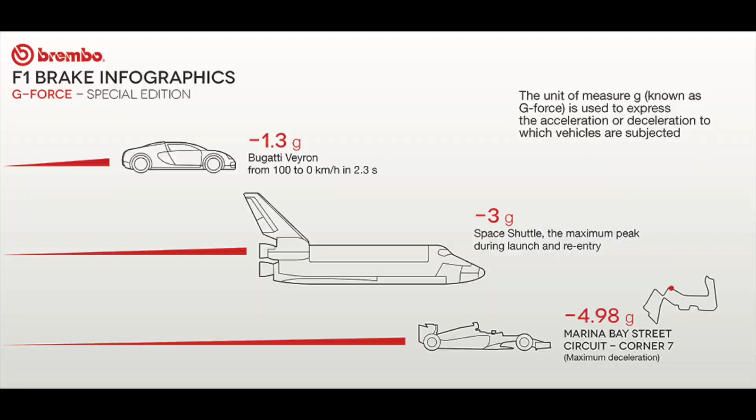During deceleration, the driver's head weighs over 50 kilos due to the 5G load. That's also why drivers do a lot of neck training.

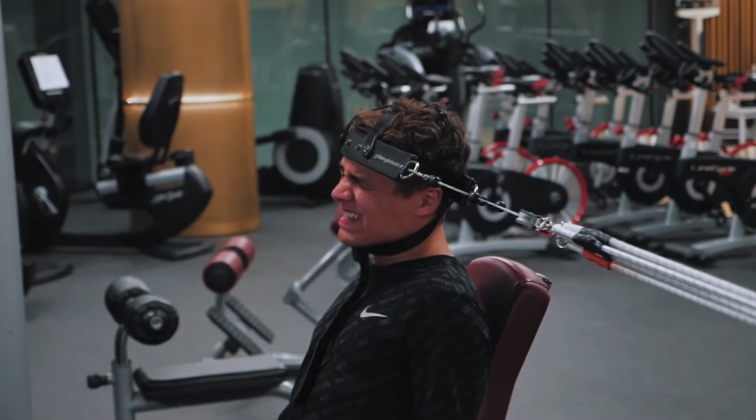If a driver tried to push the pedal in a standing Formula 1 car, he actually wouldn't be able to push it hard enough. So the driver uses his weight multiplied by the 5G force during deceleration towards the pedals to generate the pressure they need to push the pedal.

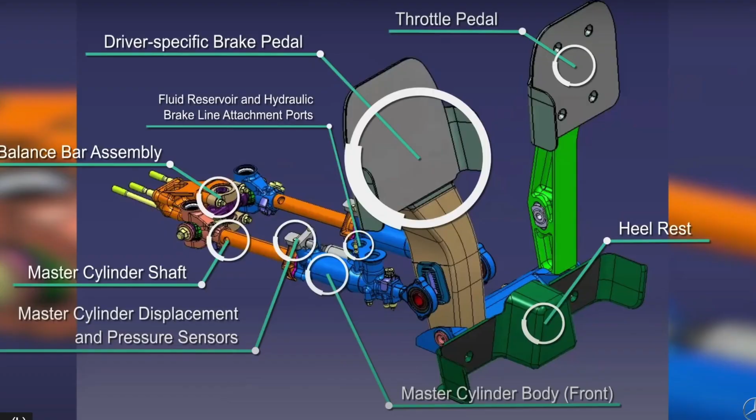It's purely up to us to maximize the braking potential. We always want to brake as late and hard as possible, using the downforce. In other words, during braking, their bodies slide towards the pedals, and thanks to this extra force, drivers can push the pedals.

Your cars at home have a servo system that multiplies the pressure you apply on your brakes to provide that necessary force. This car has ABS, an F1 car doesn't - anti-lock braking system makes your life a bit easier in a road car.

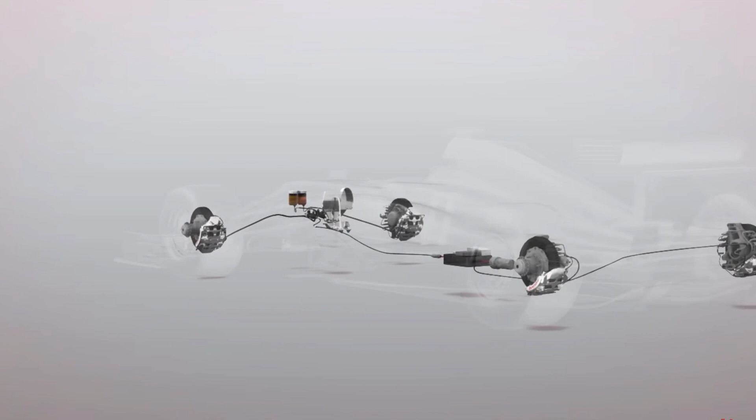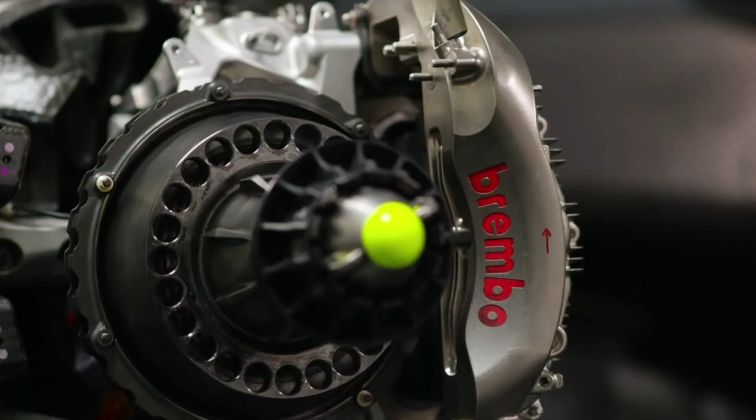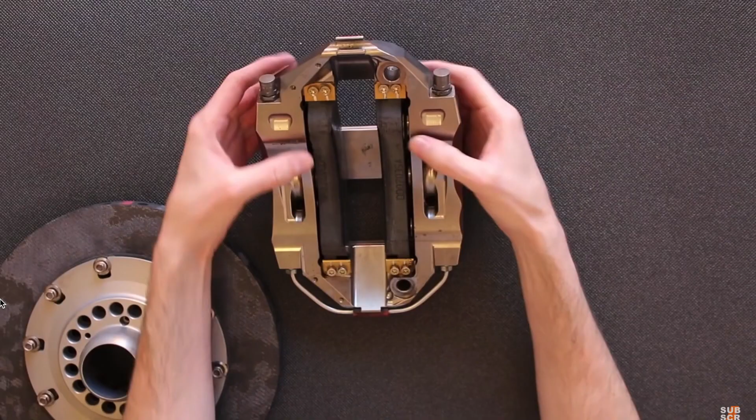Once the driver pushes the pedals, the pressure is applied to two master cylinders. One cylinder is filled with fluid connected to the front brake system, and the other cylinder is linked to the rear brake system. The applied pressure goes through the brake pipes into the pistons housed in the calipers. Calipers have 6 pistons; those pistons push the brake pads and they clamp around the brake disc. The friction between the pads and the disc slows the car down.

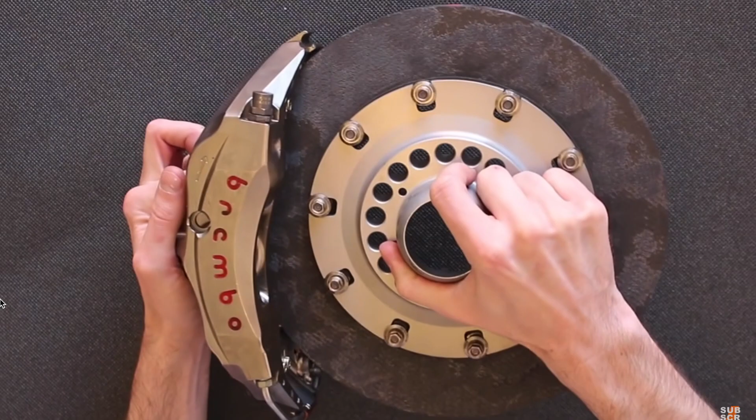Brake pads are tightly fitted between pistons and the brake disc. The front brake system is this simple hydraulic system. The rear brake system, on the other hand, is a little more complicated due to the energy recovery system, which we will talk about in a bit.

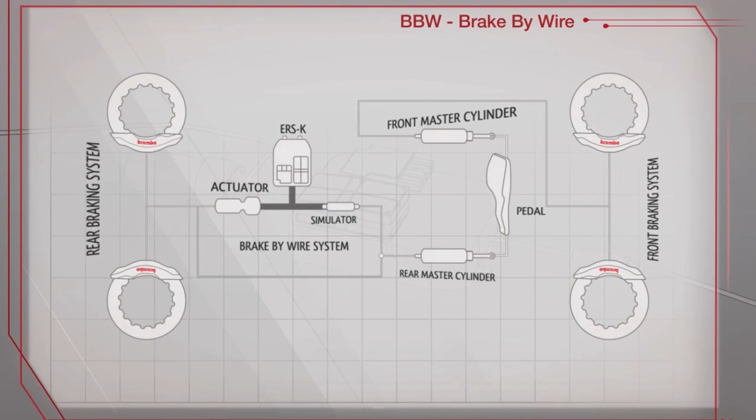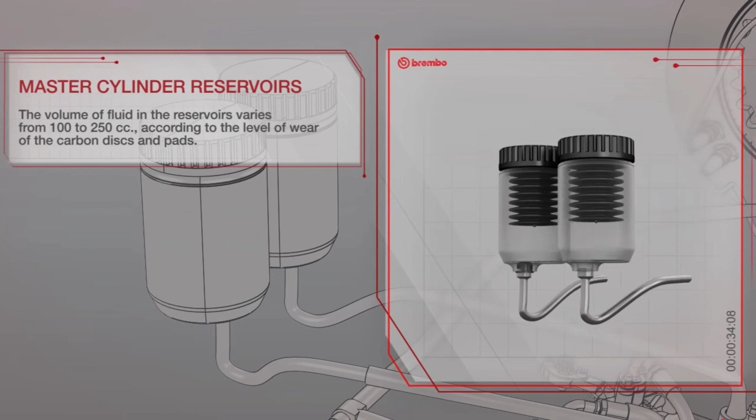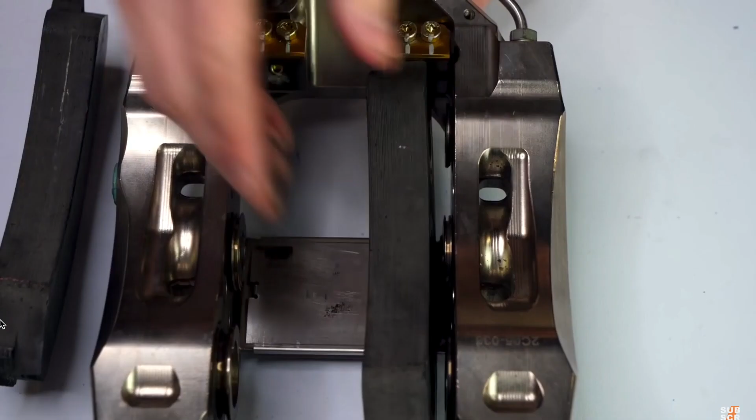Master cylinders are fed with master cylinder reservoir through the brake pipe. Master cylinder reservoirs hold 100 to 250 cc of fluid. You need these reservoirs because during braking, the brake pads wear off due to thermal degradation. The brake pads keep getting slimmer and slimmer due to wearing, so the pistons and calipers move further and further, creating a space. That space needs to be filled with the fluid in the reservoirs.

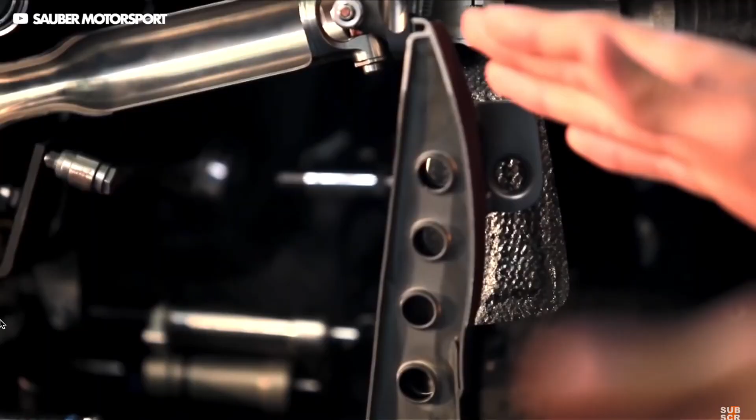The little nozzle you see here is connected to the reservoir through a hole. Once the pedal is pushed, the shaft you see here moves, and the other end of the shaft, which is a piston and a seal, covers the hole. Now we have a closed system, and the incompressible fluid inside the cylinder chamber moves into the brake pipes.

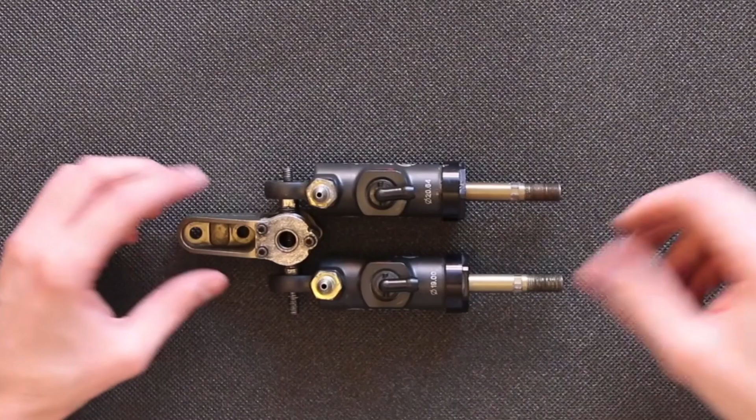Master cylinders are connected and can float like this. This is to create the brake bias, which is also called brake migration. Brake bias determines how the force is shared between the front and the rear of the brakes.

Ideally, you want each brake to do half of the energy dissipation, since an imbalance may cause understeering or oversteering. Roughly, the weight distribution is dissipated 45% front wheel and 55% rear wheel. Under heavy braking, most of the weight shifts towards the front wheel, so the brake bias sets up towards 55% frontwards.

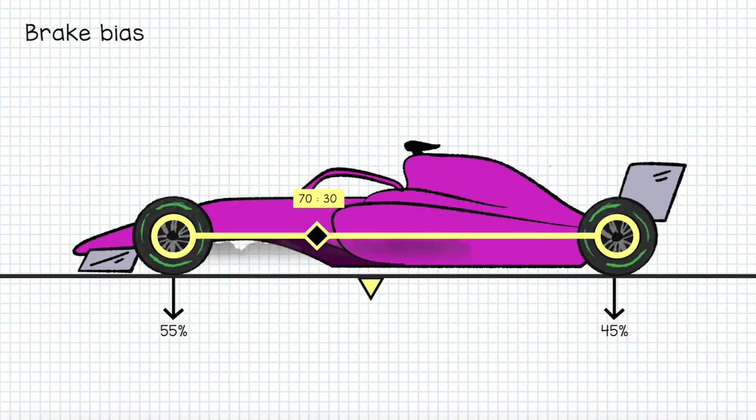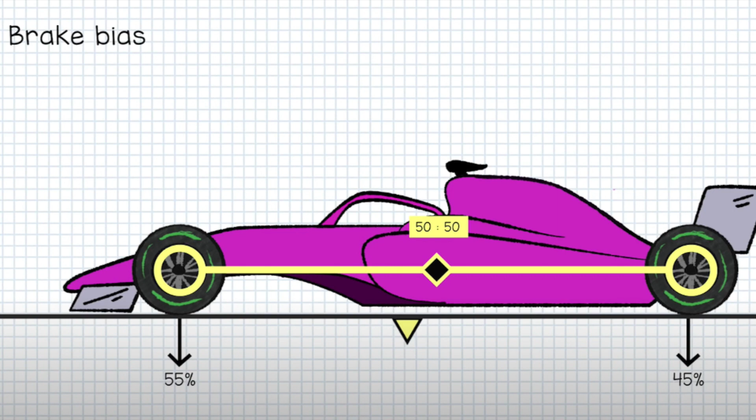Too much front brake bias locks the front wheels too tightly, causing understeering. Too much rear bias would cause the back of the car to lock too tightly, and the car would spin or be unstable. Ideally, you want weight distributed equally, and when the brakes are pushed, both rear and front lock equally. But if you have to make a choice, a bias favoring the front would be a better choice, since dealing with an unstable or spinning car is the worst case scenario you don't want to deal with.

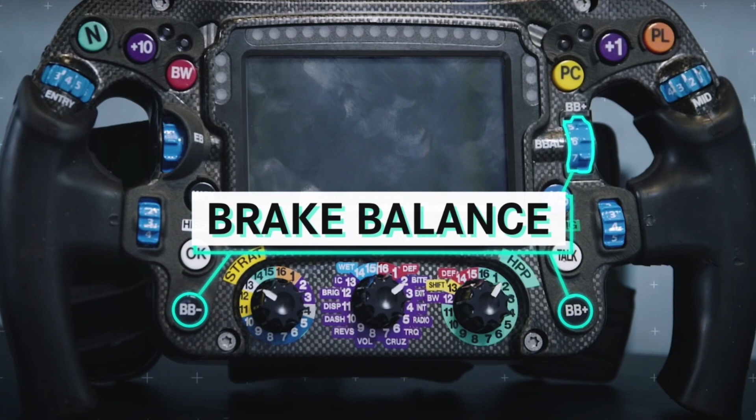Drivers can adjust the bias from the cockpit, but this is only allowed when they are not on the brakes. The reason this precision is left to the drivers is that each track and corners have different characteristics, and depending on the driver's driving style, this balance needs to be tailored towards each incident.

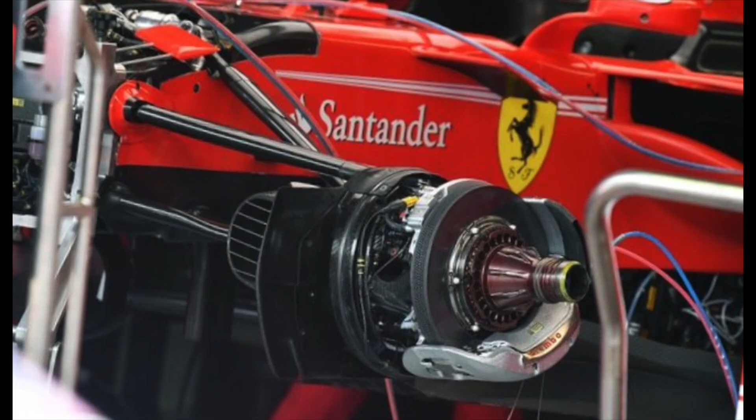In commercial sports cars, calipers are vertical. For F1 cars, calipers are located low in the car to make sure the center of gravity is low, but rather than horizontally, they are located at a 45-degree angle.

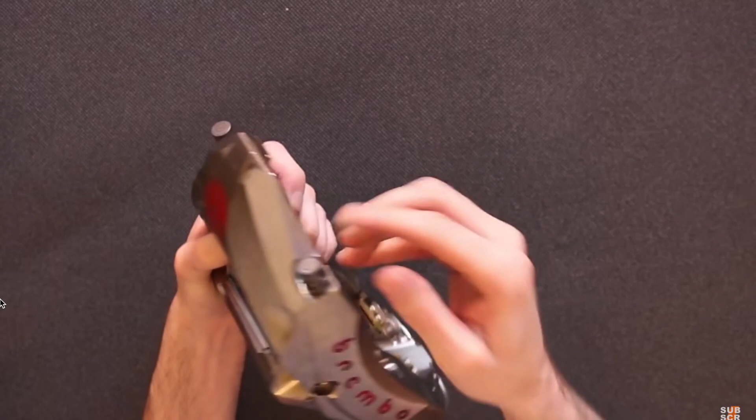The reason for this is that the bleed nipple needs to be high. This knob is called the bleed nipple, and it should be located upwards since it is used to bleed the air bubbles that get into the hydraulic system.

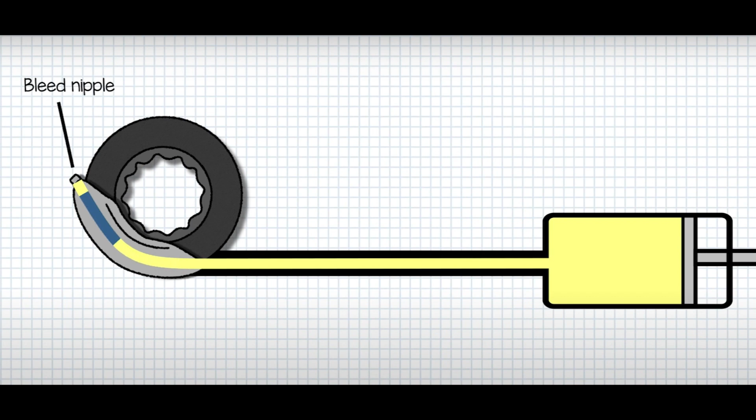Failure to bleed this gas gives a squishy feeling on the pedals, especially because the compressible gas deforms in a system that essentially needs to be incompressible, which also decreases the braking force, hence the performance. To solve this problem, teams flush the gas by opening the nipple, then forcing more fluid into the system, so the gas travels up and out of the system as the nipple is located at a 45-degree angle.

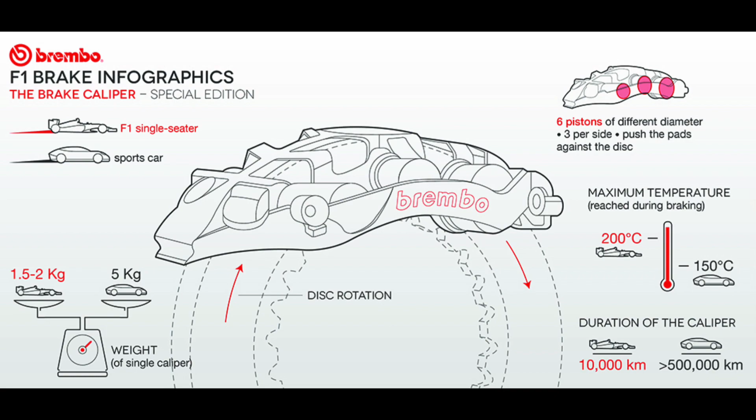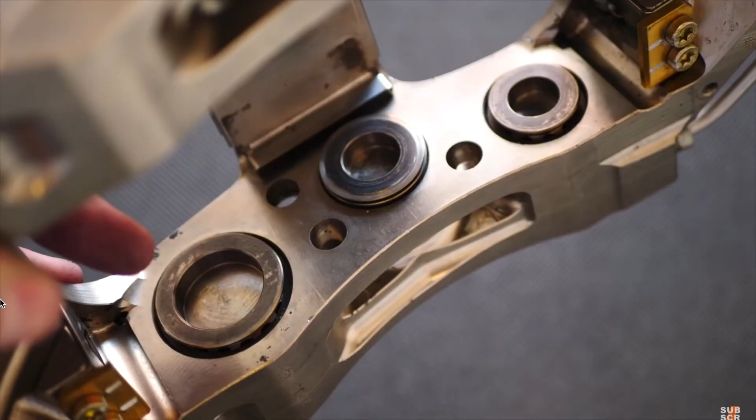The 6 pistons in the calipers are different because you want them to apply different forces. If the first contact piston is bigger, it would cause more wear as well as producing more heat since it's facing uninterrupted rotational speed.

The way the braking system works is that the kinetic energy of the rotating discs is converted into heat energy, and there is only a certain heat capacity that these brakes can operate within.

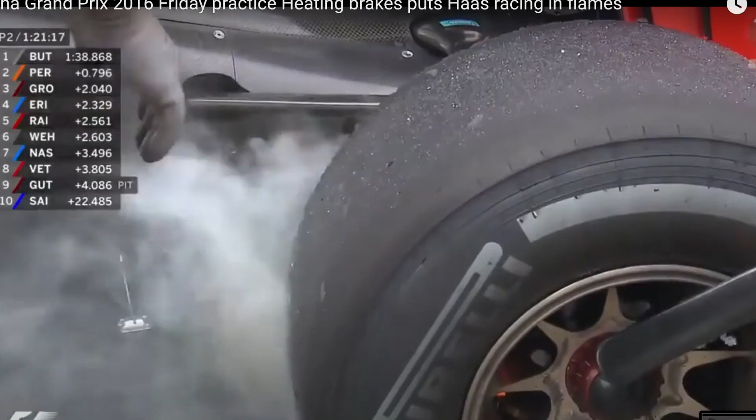At temperatures higher than 800 Celsius degrees, thermal degradation kicks in. Under heavy braking, this heat rises up to 1000 degrees. As the pads clamp around the discs, kinetic energy is translated into heat energy via friction.

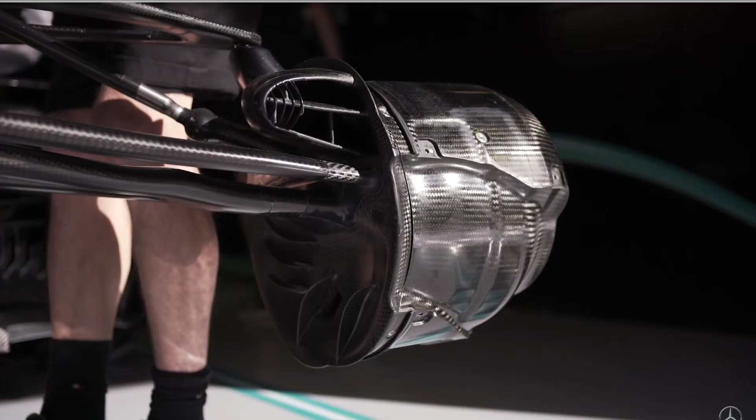If the discs are already warm, there is less ability to convert kinetic energy into heat energy. In other words, less ability to absorb energy, meaning less braking capacity. That's why the cooling system is very important.

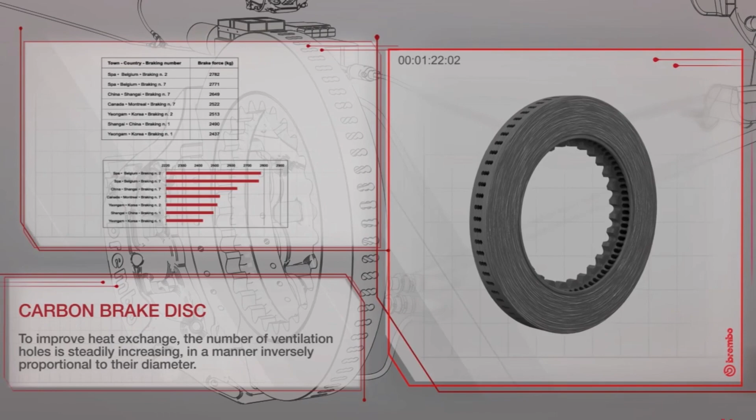Brake discs are made out of carbon-carbon composite, a carbon lattice reinforced with carbon fiber. The reason for that choice of material is both high coefficient of friction and robustness at high temperature, since the temperature of brakes can get as high as 1000 degrees Celsius.

Carbon-carbon also has very low thermal expansion as well as low thermal shock, so it won't deform or crack in sudden thermal changes. A cold brake can heat up to 100 degrees Celsius per every 1/10 of a second.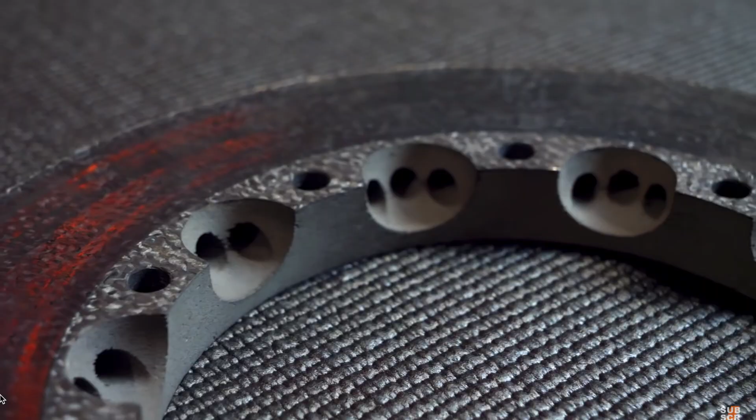Carbon brakes operate optimally between 400 and 800 degrees. Yet heavy braking can heat brakes up to 1000 to 1200 Celsius degrees. The main factor causing a brake to wear off is thermal degradation.

At high temperatures, carbon oxidizes, meaning the brake discs and the pads burn on the mating contact surfaces, creating black dust while structurally disintegrating.

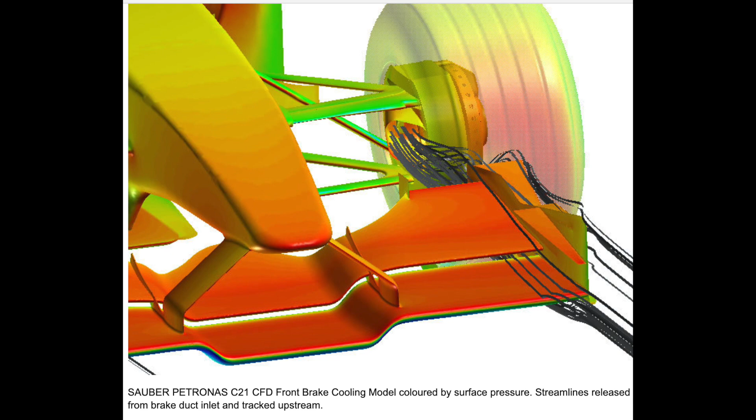That's the second reason why cooling is important, and the solution is air cooling, since we abandon cooling liquids in the brake system. These are called brake ducts.

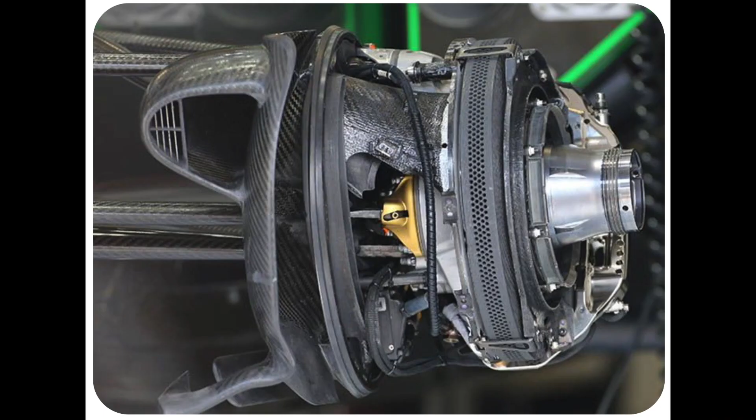As the car moves, the air passes through the brake duct into the middle of the brake disc. Since the brake disc is spinning, the air passes through the cooling holes, narrow channels on the disc that pass from center to circumference. The air molecules absorb the heat and simply flow away.

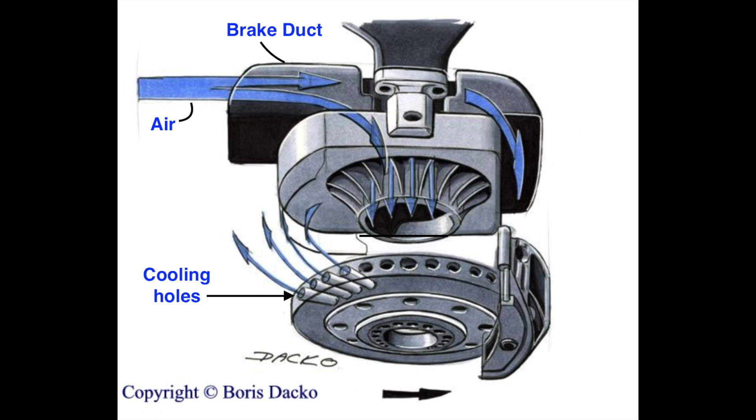Over the years, the air cooling holes decreased in size and increased in number, providing more surface area to exchange heat. Larger brake ducts can create more aerodynamic drag, but it's not that significant on the vehicle's pace.

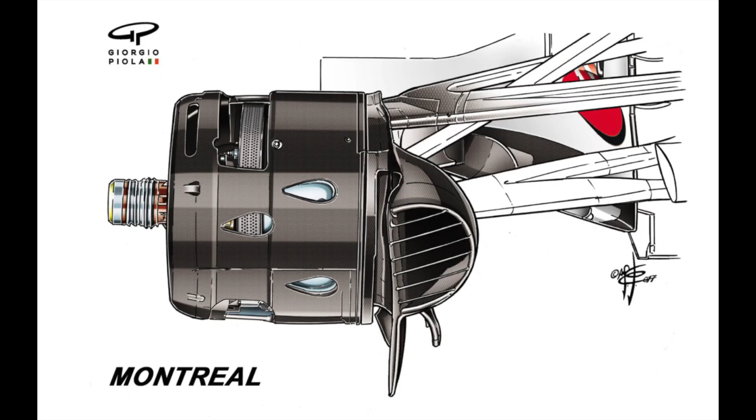The actual concern and reason to adjust the size of these brake ducts is the nature of the circuit. If a track has a lot of corners, like the track in Monaco, brakes will be used more frequently, and you need a more intensive cooling system. You simply don't want to enter braking zones at 800 degrees.

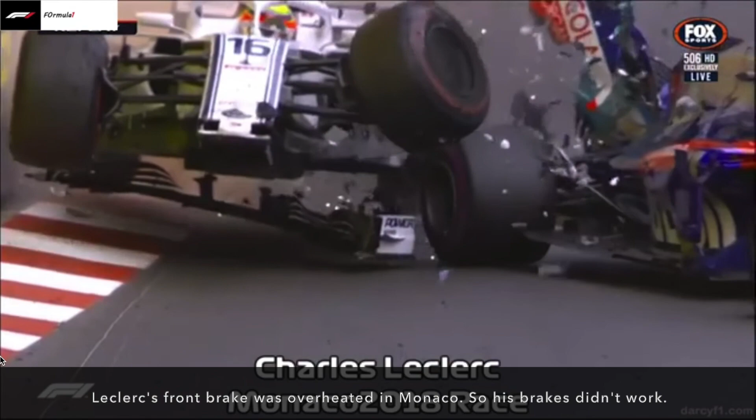In that case, to increase the number of air molecules that interact with the disc, you should enlarge the brake duct, therefore the air intake.

On the other hand, brakes don't work really well when they are cold. That's also why drivers don't really feel comfortable on their first corner of a track, since brake discs aren't hot yet, so they don't know how much brake they can get. If they don't press the pedals hard enough, they can lose advantage since they won't attack corners as aggressively.

If they press brakes too hard, they could lock the brakes up. You want brakes to be at least 400 degrees to hit the brakes.

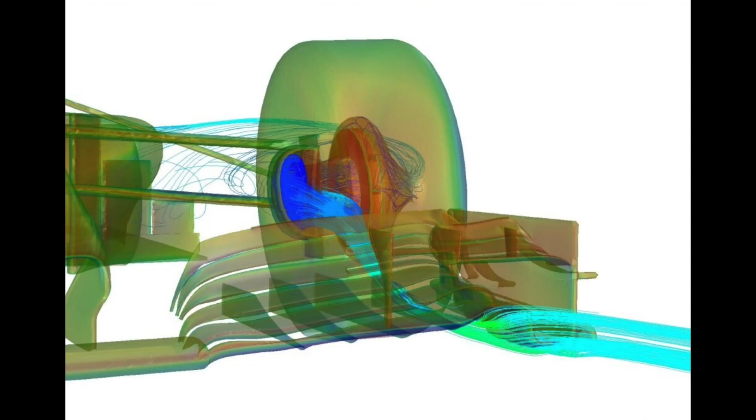So if you aren't braking too much in the circuit, there are long periods of time between braking zones and air can cool the brakes too much. To prevent that, brake ducts need to be smaller.

Some teams also tape the brake ducts to block some of the incoming air that could cool the discs more than desired. If you brake when discs are cold, it will take tenths of seconds to kick in properly, which isn't ideal.

Rear brake systems are a little more complicated. In the rear brake systems, the hybrid power unit concept comes into play.

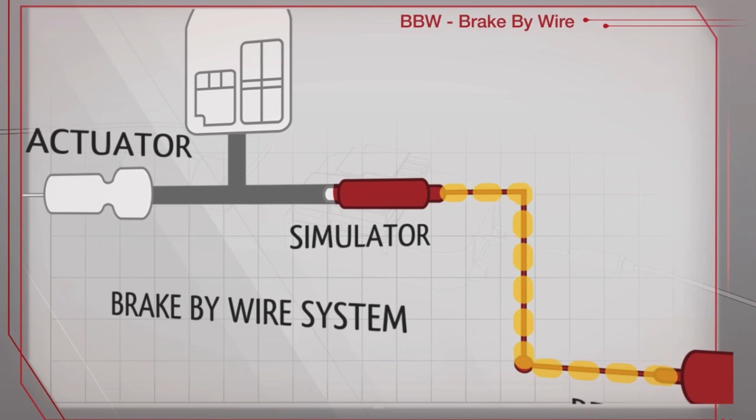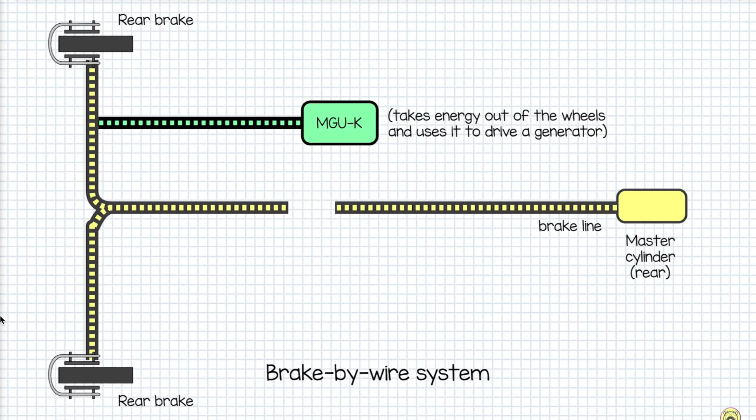Rear brakes are operated by the brake-by-wire system, also referred to as BBW. Calipers are controlled by a computer servo system called the electronic control unit, instead of hydraulic pistons.

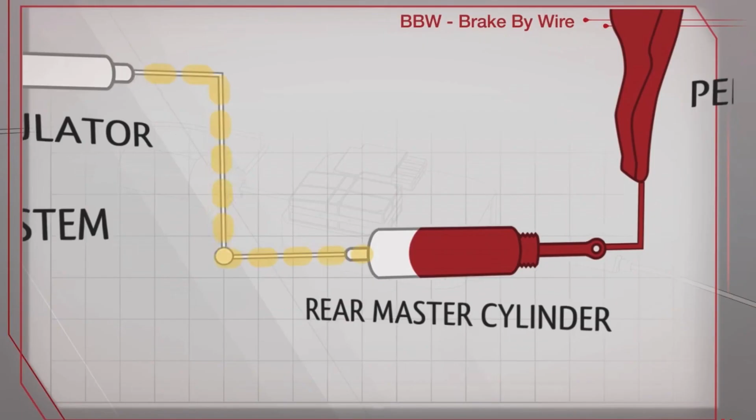To clarify, for rear brakes, the physical action of the brake pedal isn't directly linked to the physical action of the calipers. Instead, a computer system tells the brakes what to do.

The MGU-K unit slows the wheels down partially, since some kinetic energy is used by this unit to store power, and the rest of the kinetic energy is converted into heat by the rear brakes.

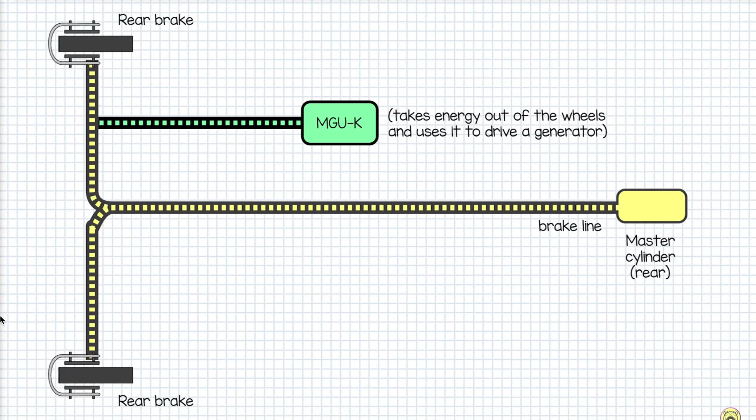The amount of energy MGU-K can harvest depends on battery levels, pedal pressure, brake bias setting, and harvesting settings. The Electronic Control Unit (ECU) controls the rear brakes.

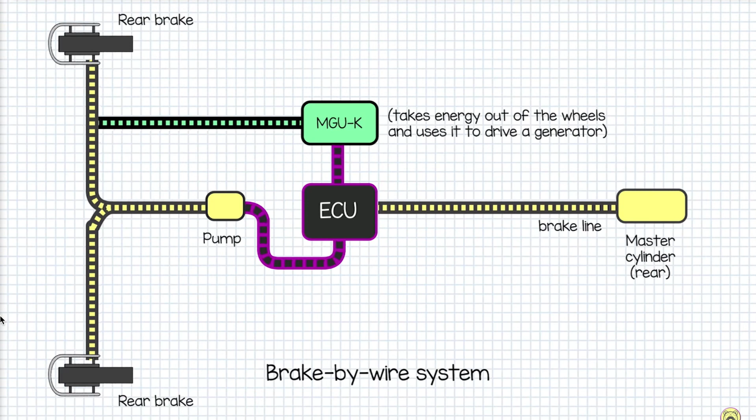MGU-K pedal pressure, brake bias setting, and harvesting settings information is constantly fed into the ECU, and the ECU calculates how the deceleration duty should be shared between the brakes and the MGU-K.

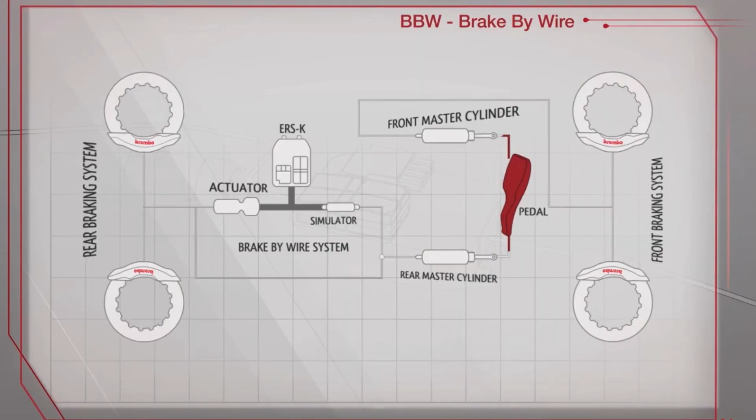Since rear brakes have some help from the MGU-K, rear brake discs can be smaller than the front brake discs. If the MGU-K fails, however, the rear brakes have to make up for it.